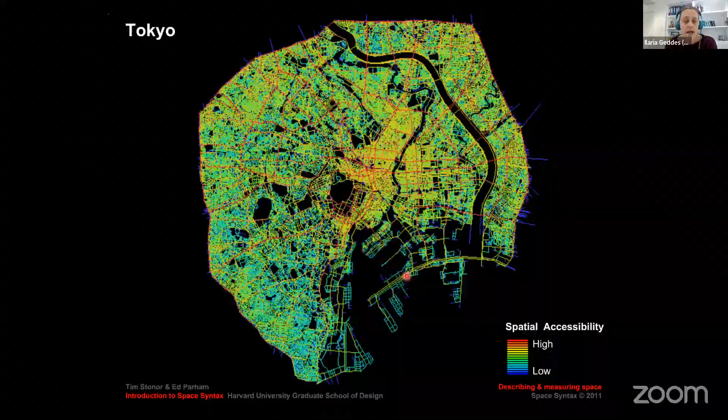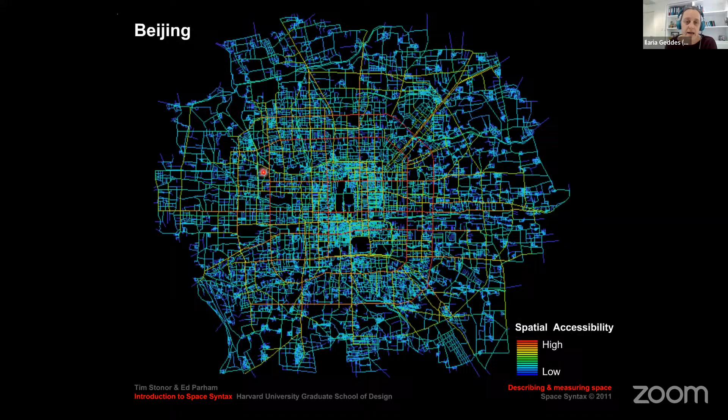So in red, basically, is the foreground network. These are the longer lines, so you tend to get this kind of wheel in the middle, and then spikes radiating out to the periphery of the city. And the areas in blue, in the lower accessibility values, are the more residential areas in the cities. And you can see these even in very gridded cities. So it might be more of a squarish wheel, but you still get these around the center and spikes coming out. And London as well. So you get the central wheel and spikes coming out.

So let's move on to the second principle, that of natural movement. So movement is a linear process during which visual information changes from point to point. What is very important about space syntax is that the mapping, the modeling of cities performed by space syntax is intended to represent what can be seen and experienced by a human within a space.

So I'm not going to get into any methodology today, but this is what the lines in the space syntax model that you have just seen represent. They represent how we view space as we move through it. Therefore, space syntax implicitly includes the relationship between humans and the physical form of cities.

So what we also know is that evidence from cognitive science, as well as from the analysis of aggregated urban flow data, pedestrian flow data, shows that geometric and topological factors are involved in navigation, far more than metric properties. So that means that we tend to move following the geometry and the topology of space rather than distance. We might think we are trying to take the shortest route between two places, but generally we tend to move along the straightest routes.

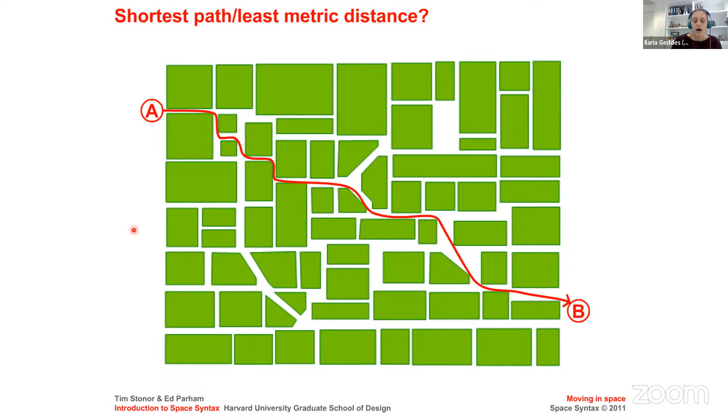Now, if you do this exercise, if you try and draw the route you might take between A to B, obviously it is a little bit skewed because you see the urban form here as the eagle flies. So you see from above. While in reality, in space, you don't have this comprehensive vision of the city from above. You're actually moving on the ground according to what you see around you. How does this work?

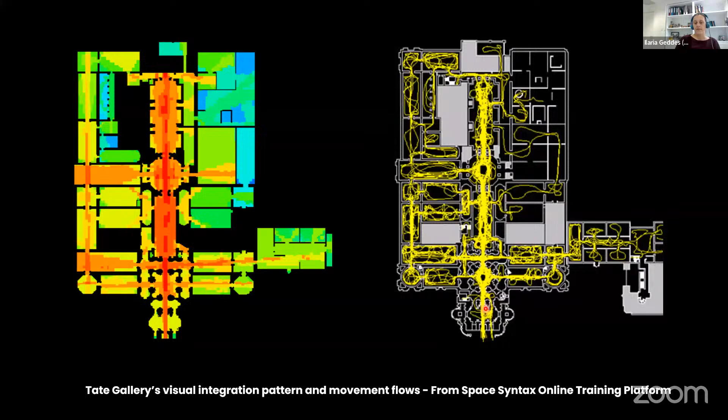So these are traces. People are followed and their movement is traced on the layout plan. It's not a statistical correlational analysis like the previous one that I have just shown. But even just visually, you can clearly see how the two variables match.

So here we investigate patterns by observing and recording. So this is not just a kind of simulation model. It is based on a lot of empirical evidence, which goes back to, I wouldn't say ethnographic research, but to a great extent it is observing and measuring how people move in space.

I'm having some trouble switching from one slide to the next, which is why I'm slow. Okay.

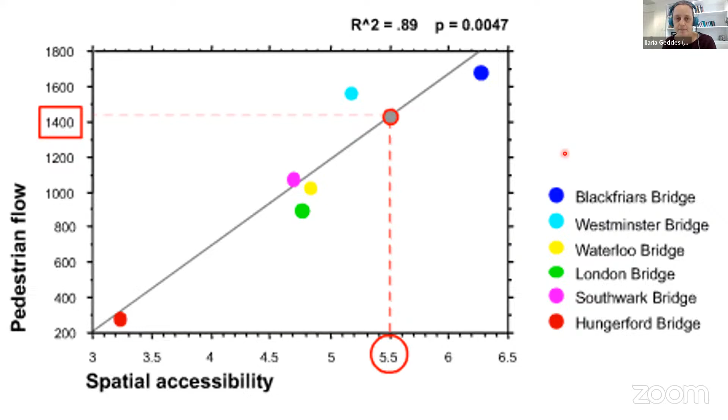So the principle of the movement economy. The movement economy is essentially based on the previous principle, the fact that the urban form shapes where we move. So he proposes that space organization in settlements, so the urban form of a city itself, generates the distribution pattern of busier and quieter movement. This, in turn, influences land use choices, which then again generates a multiplier effect on movement.

So space syntax originally, and it still does, asserts that it is essentially the urban form, and I believe in this, he has proven it, that shapes and determines where people are. But over time, it has accepted also that once land uses are placed on these according to various levels of accessibility, then they create a reinforcing effect of movement. So in fact, as we saw, it's only 60 to 80% of movement that is shaped by the spatial pattern.

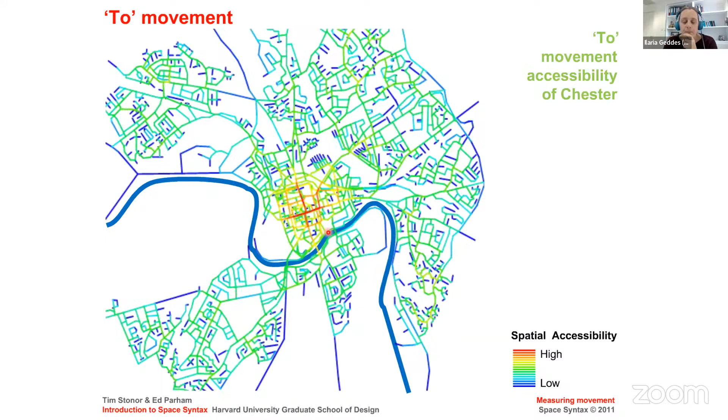This kind of analysis, we tend to call it to-movement, how easy it is to get to places. This is an example of Chester, and it always reflects the commercial core of the city.

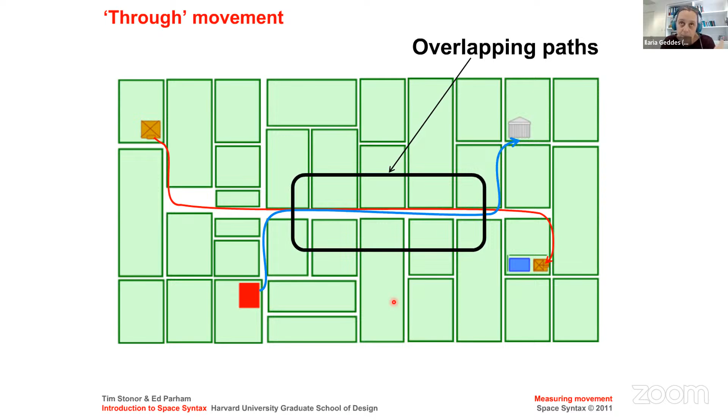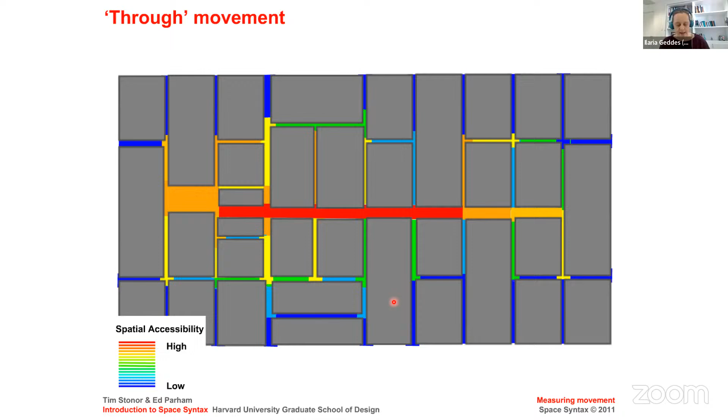The second measure, choice, that we refer to as through movement, what it does is it takes two places in the system and it identifies the most direct route between these two places. Then it does the same for two other places, and it counts the number of overlapping paths. And again, the algorithm does this for all places in the system to all other places in the system, and produces again a model which reflects a different type of accessibility, which we call through movement, how likely these spaces are to be used as a route from one place to the other.

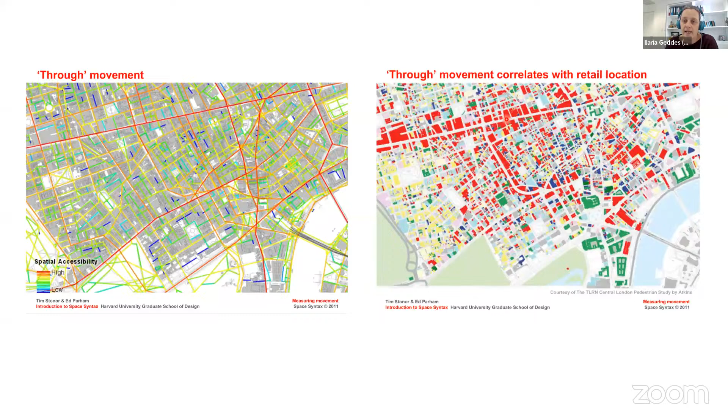Through movement, or choice, as we call it, is a measure that correlates best with retail location in cities. You can see how the highest values correlate with retail, categorized in red here. This is the same analysis. So you have retail locations in red and the choice analysis.

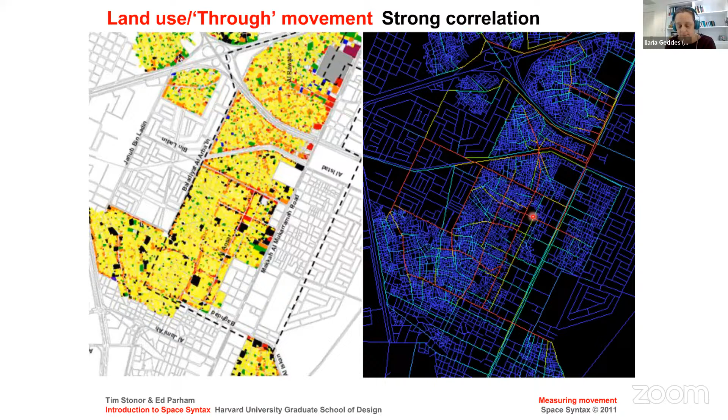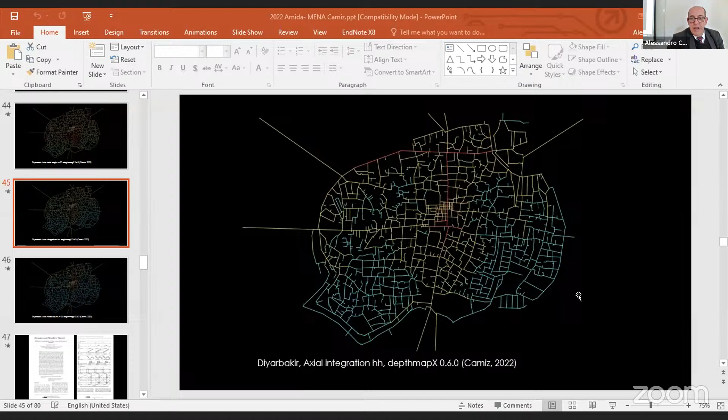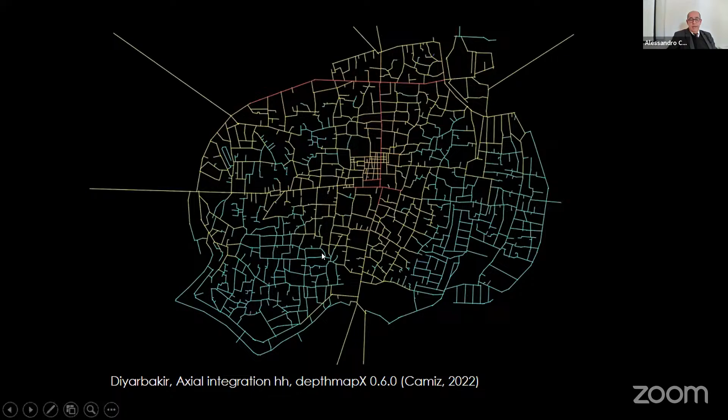Thank you. There's another question from the chat, but before we come to that, I want to show you the integration analysis of Diyarbakir, which seems to be an Islamic city, as far as I know. With a typical dead-end pattern, but again, we have the same configuration for the foreground, the wheel. And then the background is quite different because it's made of a set of dead ends, making them not very much integrated.

But the point is, you can take any city in the world and make your axial map of it, and then do the integration analysis on that and see what comes out, and probably say that that city is different from the other ones, of course.

Zeruati from the chat, you want to speak up yourself? If not, I can read that. Hi, everyone. If we want to explore the sense of safety and the location of crimes in the street network, what measures can be correlated to this?

Okay, I used to do a lot of work in crime. It's been a while. If you want the specific measures, you need to go back to the literature. It's fairly easy to find, but it really depends on what type of crime you're measuring. Because you don't measure spatially, let's say, financial corruption. This is not something that has a spatial form as far as I know.

What we call opportunistic crime has a spatial patterning, whether it is pickpocketing or burglary in houses. Depending on the gravity, let's say, of the crime, they tend to pattern across the range of scales. So things like pickpocketing tend to take advantage of movement and high movement flows, high presence of people. So it's difficult to pickpocket someone where there are no people.